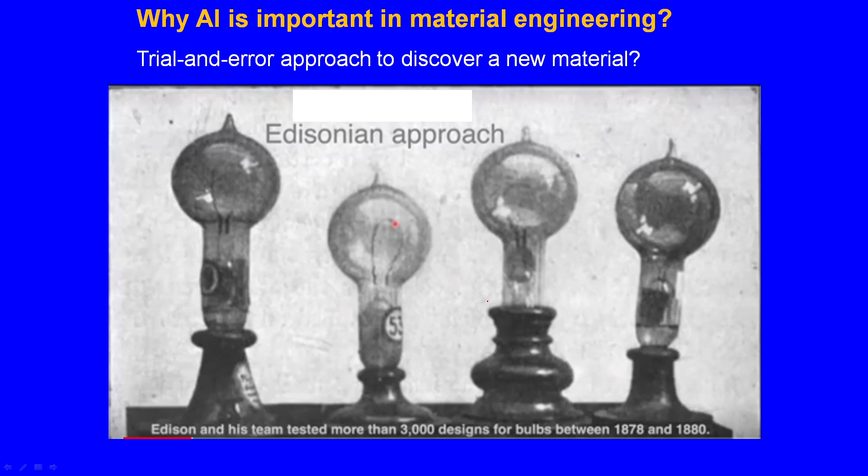And this is what is called the Edisonian approach, because Edison and his team tested more than 3,000 designs of the bulb between 1878 and 1880. Within 2 years, they tested more than 3,000 designs of the bulb. So, imagine how many people were involved and how many times they failed. To succeed, you need to fail. That is the real problem with the Edisonian approach. But that is no longer possible. So, you have to think about something new.

Then you have to understand how this subject or knowledge has changed from the first paradigm to the fourth paradigm. The first paradigm was empirical science, everything was empirical, that is before 1600, before Galileo's time. Then came the second paradigm, which was basically model based science. And finally, after the 1950s, we could correlate structure and properties with performance. This third paradigm came in the 1950s, known as computational science, which is basically simulation based. There we can do a lot of simulation using computers, density functional theory, molecular dynamics, and this can provide us new ways to design materials.

But that is not all. Then what you have is basically AI based techniques, what is called the fourth paradigm. This is what is called the fourth paradigm, right. You can go back to my lectures and find that. There we are handling data science. We have a lot of data; how to analyze the data and try to find out the trends, as we just talked about in the first part of this lecture.

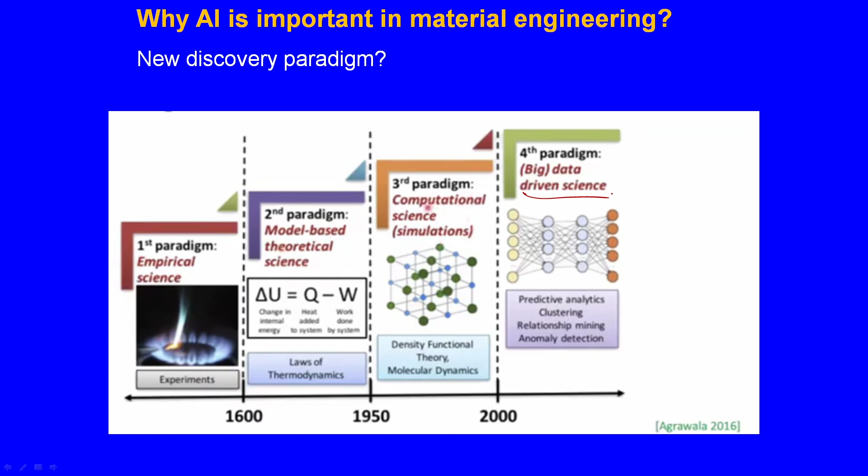In the last 50 years, between 1950 and 2000, the third paradigm started. Now we have gone into the fourth paradigm. So, this is something which you wanted to learn, that is what I started with.

But we are doing materials. If you want to do materials modeling, you should know the basics of material science. The basic thing of material science is the correlation between processing, structure and property. And we spent quite a lot of lectures, almost 12 to 14 lectures, on this aspect, trying to help you understand the basic aspects of material science, so that you can design new materials with a target set of properties and discover new materials.

And there we talked about fundamentals of structure, properties and all these things: crystal structures, atomic structures, microstructures, nanostructures. And we talked about different properties, mechanical, physical, magnetic, electronic, electrical, and we expected you to gain a full understanding of this correlation between structure and properties. That is not easy; remember, that is the basis of material science.

We have to integrate these basic things with big data science, and that was my main motto when I designed this course, so that you can get a lot of these basic concepts clear, take the clue from these basic concepts, and apply them in data science.

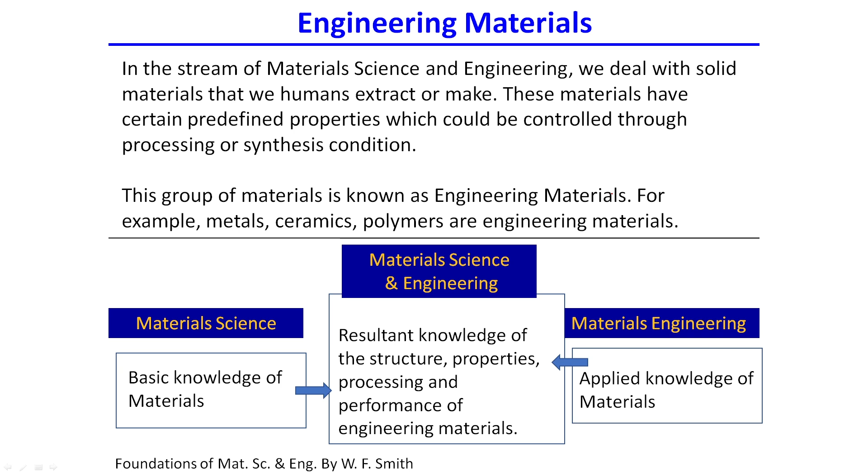And materials can be anything, but are they useful? That is why we talk about engineering materials. Engineering materials are ones which humans extract or make for any utility. So, you can have different kinds of materials like metallic materials, ceramics, polymers, composites. They are all called engineering materials because they are useful. In order to do that, you need to understand the basics of material science, and also the correlation between structure, property and processing, so that you can apply this in the design of materials.

And the basic thing is the microstructure. That is what controls the material properties. There is a key link between the synthesis or processing of materials and the properties. And structure means starting from atoms, crystal structures, grain structures, and finally microstructures. You have grains, boundaries, defects; everything is going to come into the picture. You can have single phase microstructures or multiphase microstructures.

Like in steels, you have alpha iron plus cementite. In pure iron, you have only grains of alpha iron. So, this is the difference. When you have two phase or three phase microstructures, the distribution of the phases is also going to play an important role. The interface between the phases is also going to play an important role.

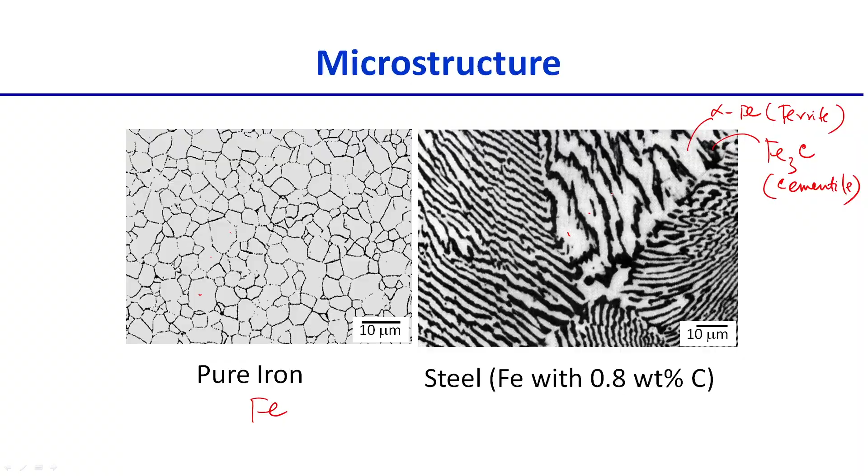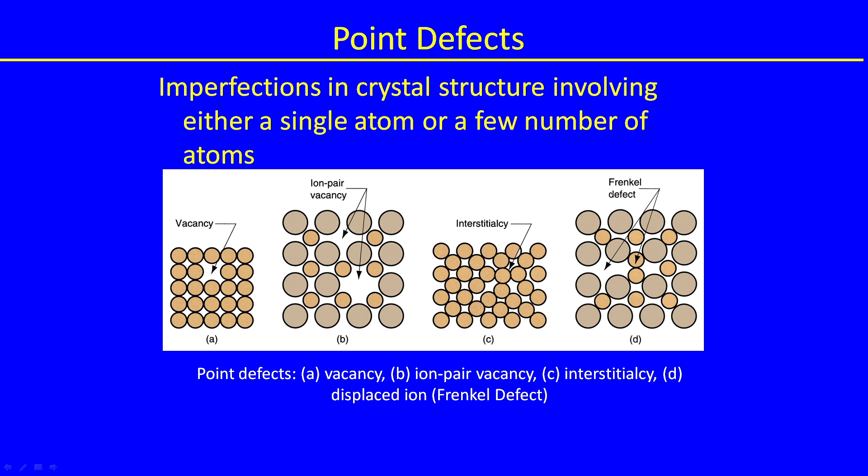Then you have defects. You cannot have perfect things in the world. Nothing is perfect. So, imperfections in crystal structures are very, very important. You can have point defects, line defects like dislocations, surface defects or 2D defects like twinning. All these defects play a very important role in materials.

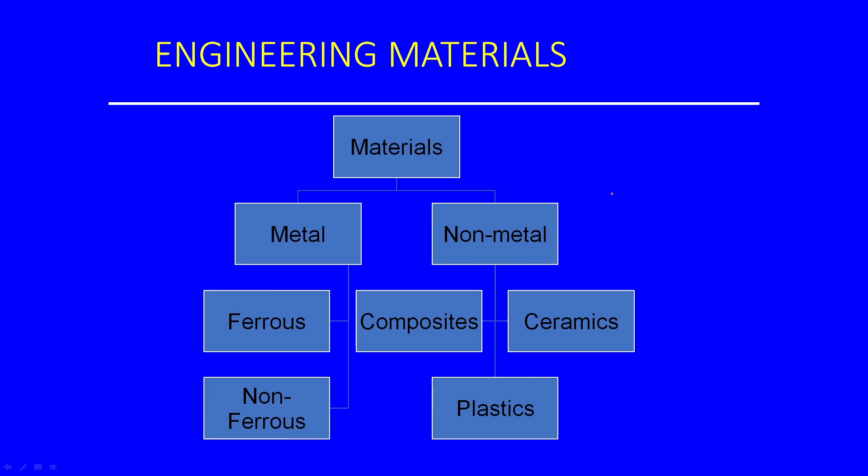And we talked about a lot of engineering materials: metals, ceramics, polymers, non-metals, composites, plastics, many things. But metals are the largest group. You can have steels, aluminum alloys, titanium alloys. I tried to avoid it because that is a massive topic.

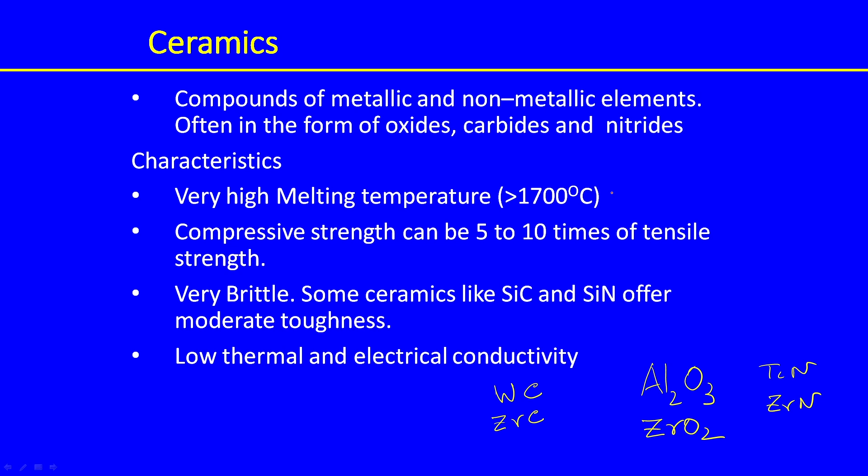And then you have ceramics. Ceramics are compounds of metals and non-metals. They often form oxides, carbides, nitrides. They have much different properties than metallic materials. They can have very high melting temperatures and very high compressive strength, but they are very brittle. They have low thermal and electrical conductivities. Tungsten carbide, zirconium carbide, aluminum oxide, zirconium nitride, all these examples were given. You can have hydroxyapatite, kaolinite, sialon.

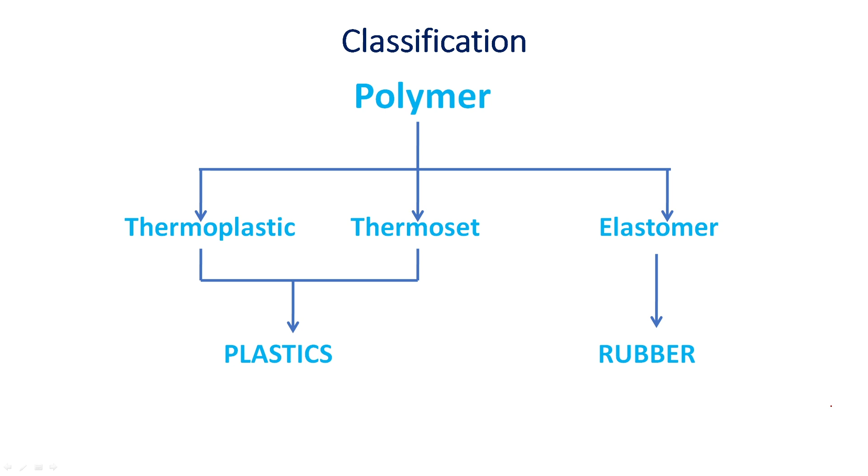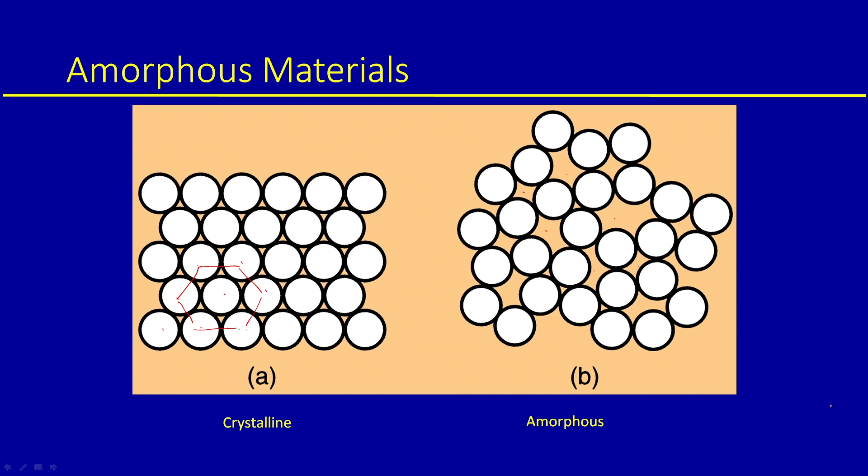Then you have a whole lot of things in polymers. You have thermoplastics, thermosets, elastomers. You can also have amorphous materials like glasses. Many of the polymers are actually amorphous. So, amorphous materials are widely present in the world and we cannot avoid them. Compared to metallic materials and ceramics, amorphous materials are mostly either glasses or polymers.

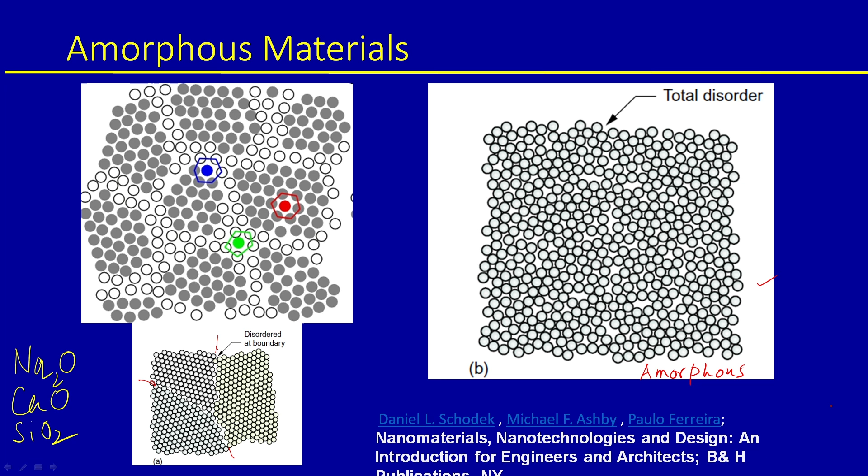So, amorphous materials have random structures. Glass is an amorphous structure of sodium oxide, calcium oxide and silicon dioxide; remember that. And there are no grain boundaries and no ordered atomic arrangement in glasses.

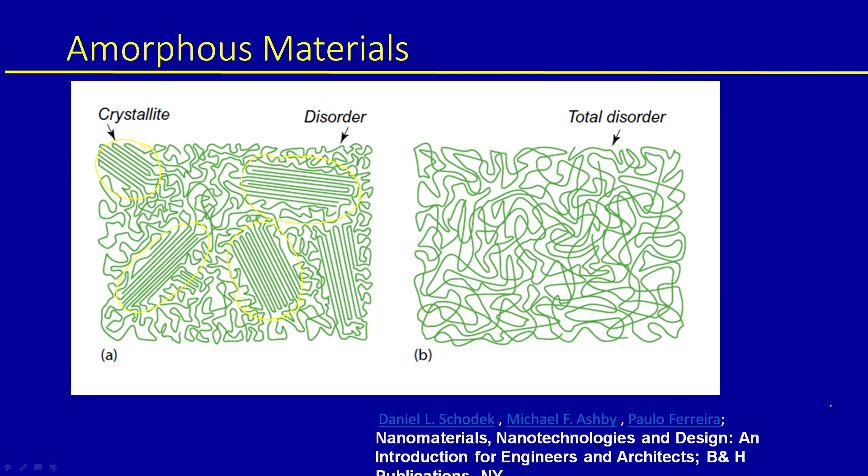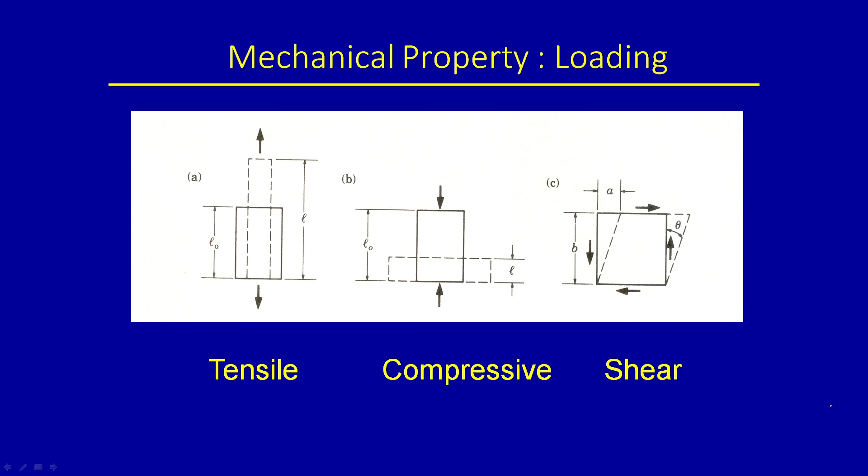So, in a polymer you can have complete random chains of molecules, you can have crystalline plus amorphous structures also. But that was the different structures. You can also have different properties like tensile, compressive, shear in mechanical properties. You can have electrical properties like conductors, insulators, semiconductors. We discussed different models of that, and you can have metals, ceramics, polymers, semiconductors again.

Then you have magnets. Magnetic properties are very important, right. They actually provide you a lot of interesting insights. And then we went into processing operations, different kinds of processing operations, because those are the structure properties. Then you have to talk about processing conditions, shaping operations, how do you shape a component, how can you improve properties, like heat treatments. You can do surface treatment also, like clean, coat, treat, deposit materials.

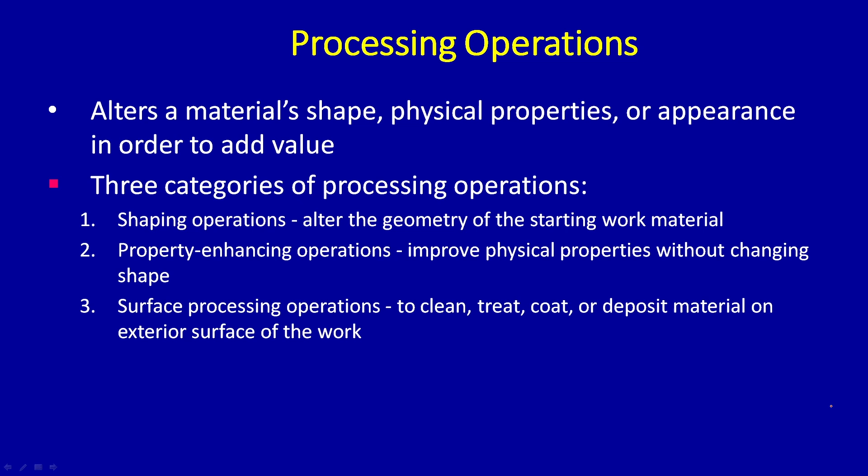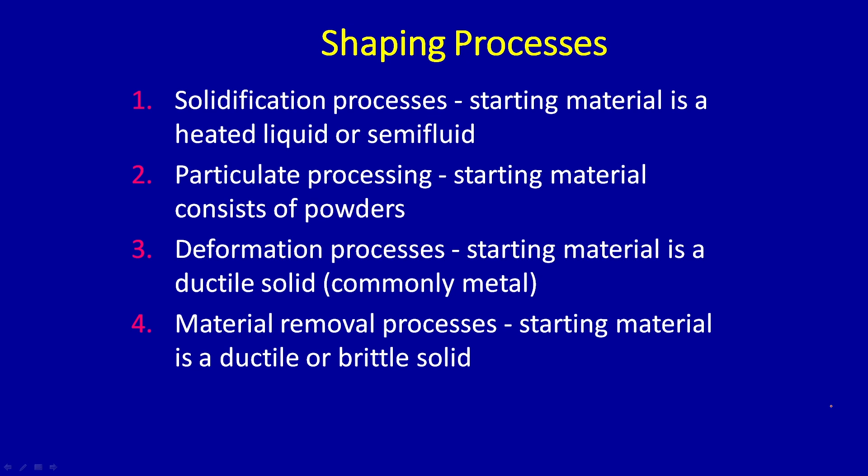And shaping components are 4 types. We talked about it: solidification processing, particulate processing like sintering, deformation processing, and material removal processing like machining, right. So, in solidification processing we pour a liquid metal into a cavity and solidify. In powder processing we take a powder as a source of material, sinter them to form a component, and in deformation processing we take any bulk material, deform it plastically to give a shape. Machining is a removal process. Machining means we cut something, remove material to give a shape, right.

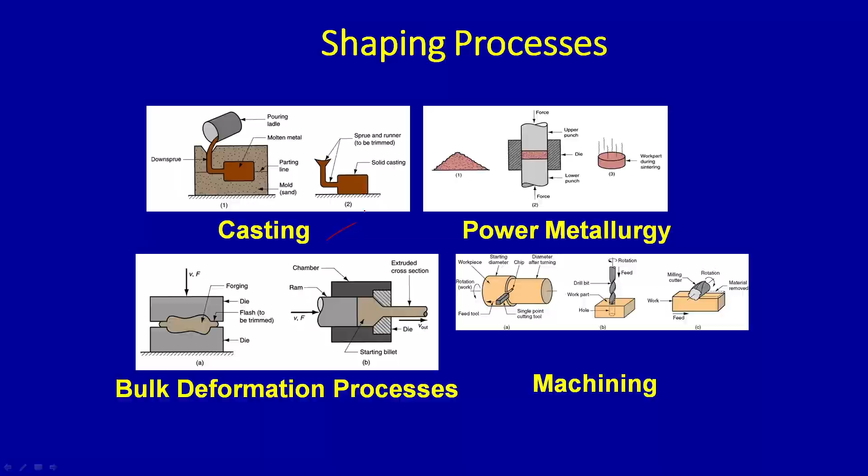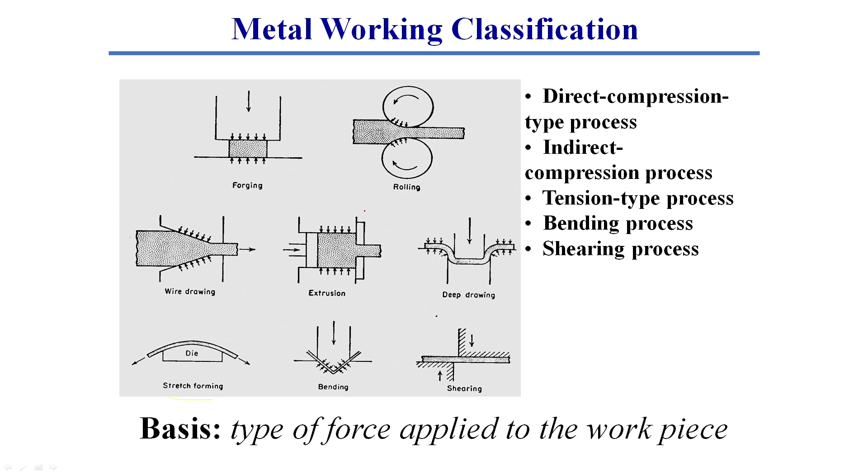So, these are the different shaping processes we discussed, and more important is bulk deformation processing like rolling, forging, extrusion, stretch forming, bending, sheet metal forming, all kinds of things possible. We discussed quite a bit of this. Powder metallurgy: we take the powders, we process, characterize the powders, then we do pressing and sintering, and we can do other kinds of techniques also. So, by pressing we create a green compact, and these green compacts are then sintered to obtain the sintered products.

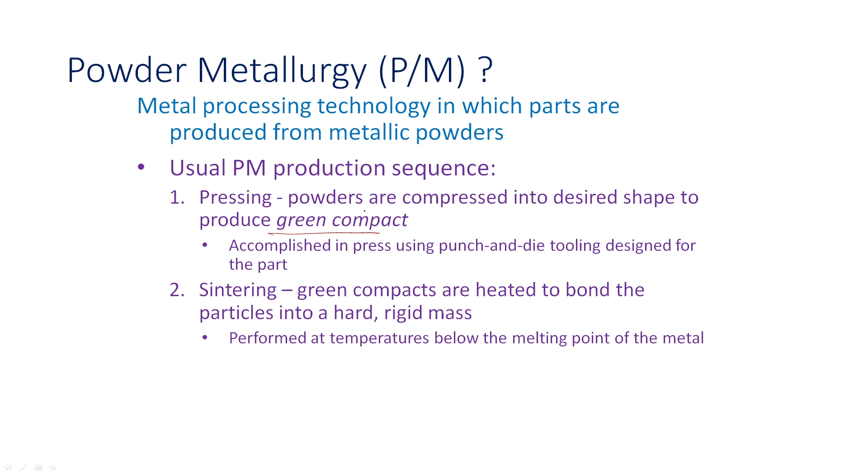So, this was about the basics of material science, which I covered in the last 5 minutes, okay, but it will take you one full course or maybe more than that. So, please look into different course structures at NPTEL or other fora where you can actually get a knowledge of that.

Then comes the concept of machine learning, how it is different from your conventional approach like trial and error methods. We have trial and error based discovery and design of materials. We can also have a third paradigm where you use simulations like quantum mechanics, molecular mechanics, all kinds of things. But we can also do high throughput screening, we can screen the materials and get a lot of understanding, right. And machine learning methods can be utilized to speed the material development cycles, and machine learning is something which can learn from data. I discussed a lot about it, how the task is important.

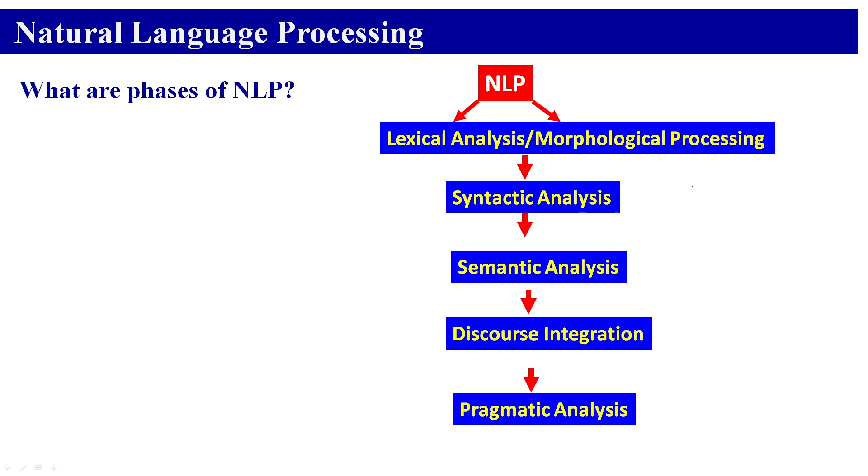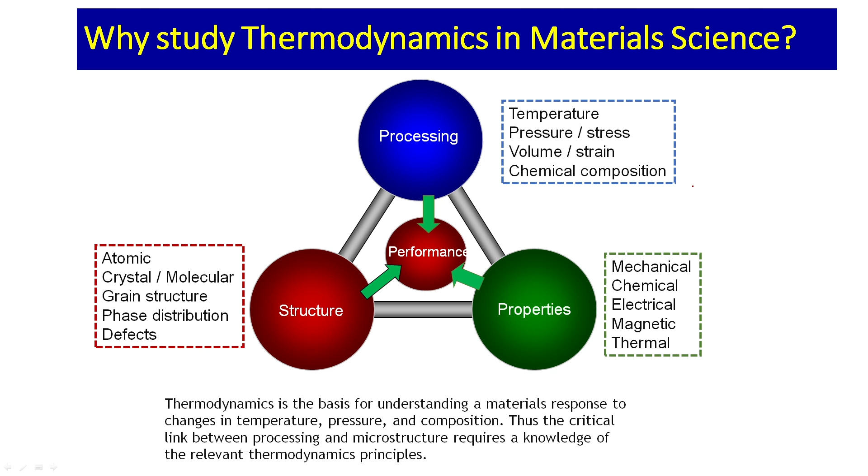You have materials design at different length scales. You can have the properties, performance, structures, and processing, and these are connected to get an idea about performance, right. That is the key idea. So, when you talk about integration of data science with these things, what is called the length scale, first you start with CALPHAD, and CALPHAD provides you calculation of phase diagrams that gives you all kinds of properties like entropy, enthalpy, Gibbs energies, diffusion coefficients, heat capacities, and sometimes calculation provides you many other data.

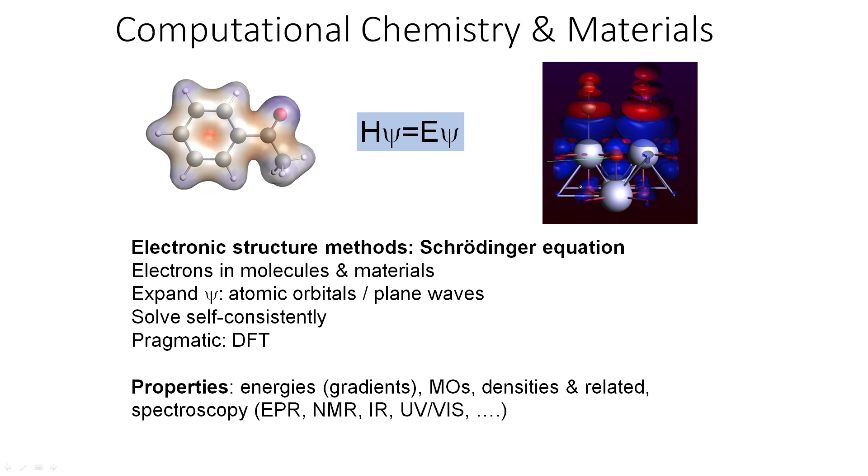But microstructure modeling is very important. That is where you need to use phase field modeling, and phase field modeling uses the interface. There is a diffuse interface model where you can actually add an interface term and do that. Then finally, one of my colleagues from IIT Kharagpur talked about computational chemistry and material science like electronic structures, DFT calculations, as well as molecular dynamics simulations. Newton's laws of motion are used for molecular dynamics simulations.

Finally, we also talked about some bit of data preprocessing and data quality: data cleaning, data integration, reduction and transformations. And why do you need that? We need accurate data which is complete, consistent, timely, believable, interpretable. That is why we need to do data processing. Please remember that data preprocessing is the critical step when you want to build machine learning based models. I do not want to go into details of that.

Finally, you have to do a model score, that is what the F1 score does, how a model is performing, good or bad, and this is nothing but a harmonic mean of the precision and the recall. And at the end I talked about material informatics, which is based on information and data science, and it is a very important tool nowadays.

And as I told you, we are going to develop a new course on material informatics, maybe after 1 year or so you will get to know about it. And this course will talk about details of material informatics, because data science is going to be very important in material science also. I will discuss all these aspects there, I do not want to go back into that.

I just like to say that I hope you have enjoyed these different lectures of this course, and this has provided you some basic concepts of machine learning, deep learning and informatics, on which you can build. This is like a foundation, and now on the foundation you can grow your knowledge and gain more and more understanding. And I hope my TAs have given a lot of time to answer your questions, explain these concepts by giving examples and some programs.